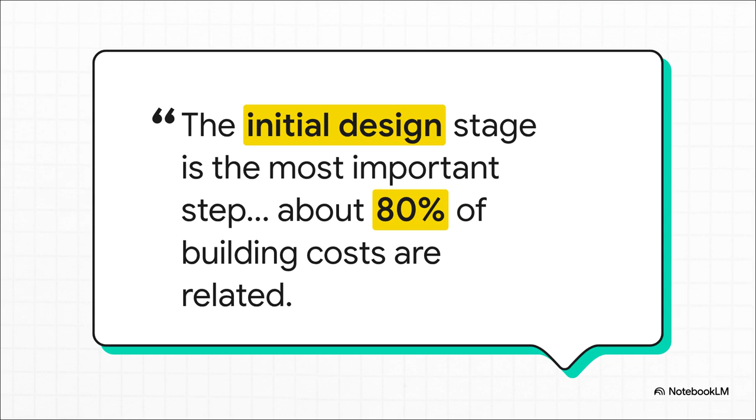And this is so crucial because decisions made right at the beginning, at the design stage, have these enormous, long-lasting consequences. The choice of a window, its size, its placement, can lock in decades of energy bills and comfort levels before anyone even sets foot inside.

Okay, but this is where the story gets really interesting. Because the solution isn't about throwing more tech at the problem, it's about this really clever piece of passive design that works with nature, not against it. So let's meet the hero of our story, the light shelf. Now I know it looks deceptively simple. I mean, it's basically just a shelf in a window. But what it does is incredibly smart. And it's a passive system, which means it doesn't need any energy at all to do its job.

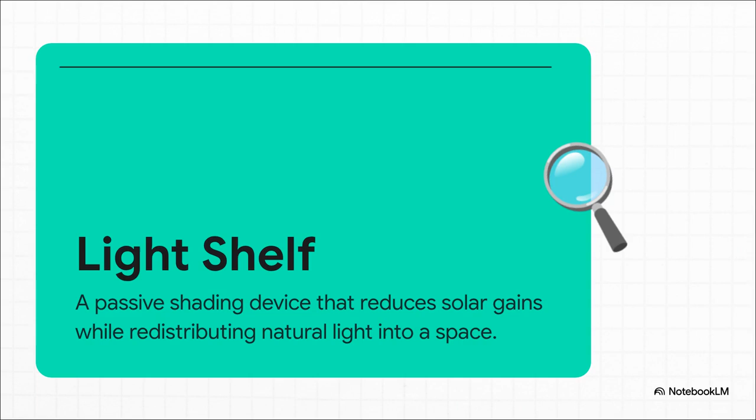The real genius here is its 2-part job. On one hand, the shelf blocks that harsh, direct sun that causes all that heat and glare right near the window. But at the exact same time, its reflective top surface bounces this gentle, indirect light up onto the ceiling, illuminating the entire room more deeply and evenly.

But just slapping a shelf on any old window isn't going to cut it. Like any good recipe, the real magic is in getting all the ingredients and their proportions exactly right. The researchers were facing this really complex balancing act, kind of like baking the perfect cake, right? If you let in too much light from a huge window, you get unbearable heat. That's way too much sugar. But if your shelf is too big, sure, you block the heat, but you lose all that useful light, not enough flour. It's all about finding that perfect equilibrium.

And these are the 2 main things they were trying to balance. First, thermal comfort, making sure people actually feel good. Not too hot, not too cold. And then visual comfort, making sure they can see well without that annoying, productivity-killing glare. Essentially, they needed a way to measure both of these very human experiences.

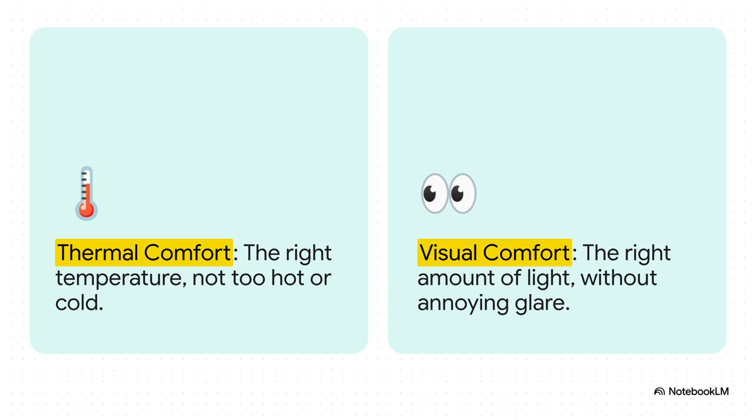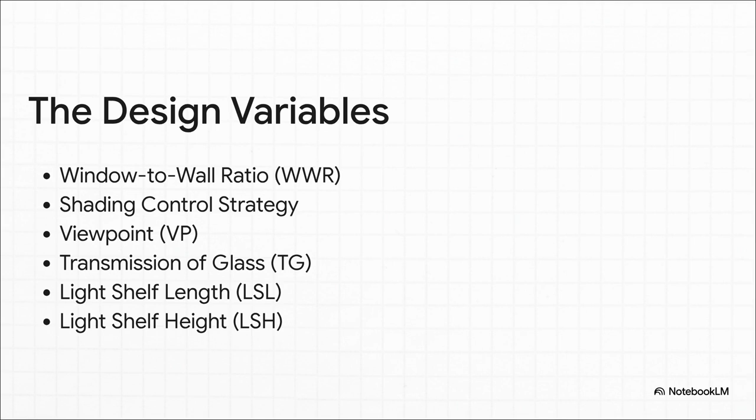So they started playing with the ingredients. They tweaked the window-to-wall ratio. That's basically just how much of the wall is glass. They changed the shelf's length and its height. They experimented with different types of glass, and they even modeled various automated shading strategies. Okay, so finding that perfect combination wasn't just some thought experiment. They had to put these designs through thousands and thousands of rigorous digital tests.

7,500. That's not a typo. To find that perfect recipe, they used powerful computers to simulate a standard office in Tehran, testing 7,500 different design combinations. I mean, talk about an epic search for the ideal window.

And they had really clear goals. For temperature, they wanted a design where fewer than 10% of people would feel uncomfortable. That's a metric called PPD. And for the lighting, they were aiming for a glare level so low you wouldn't even notice it. That's measured as DGP. They were hunting for that sweet spot.

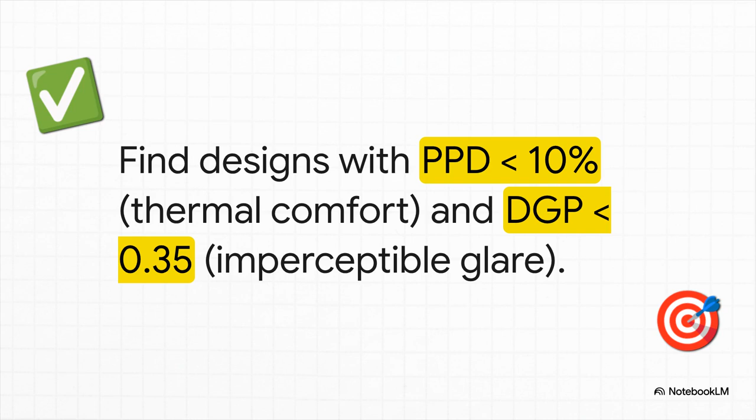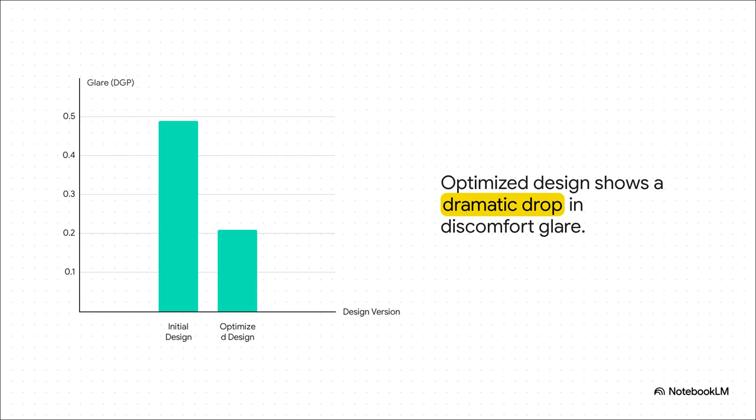So just how big was that drop? Well, the numbers are pretty incredible. We're talking a maximum reduction in glare of over 70%, and a drop in thermal discomfort of over 57%. That is a huge, huge improvement in the quality of that workspace.

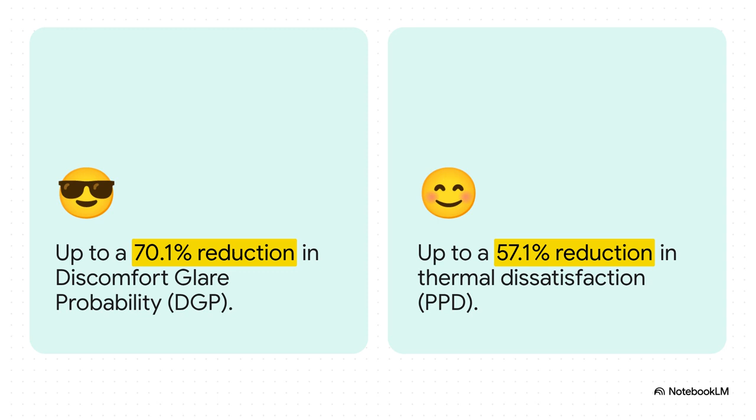So this is the really cool part. This isn't just some interesting academic paper. The results give us a practical blueprint that architects and designers can use, like right now, to build better, more comfortable offices. And here it is. This is the winning recipe for a south-facing office in Tehran. You've got the ideal design, a window that covers 60% of the wall, a light shelf that's 0.4 meters long, and some very specific glass. This is a real, actionable blueprint for architects.

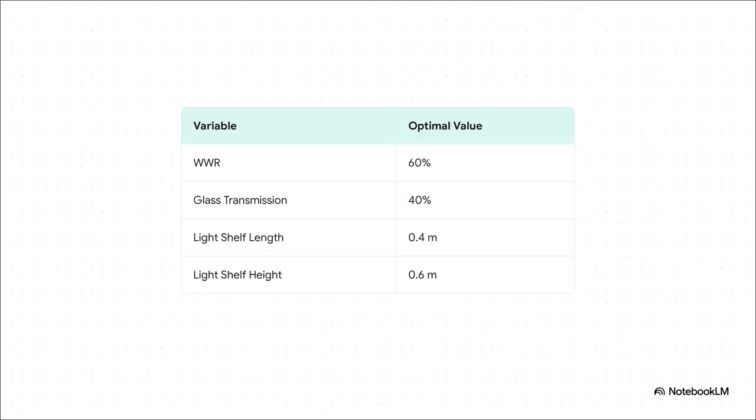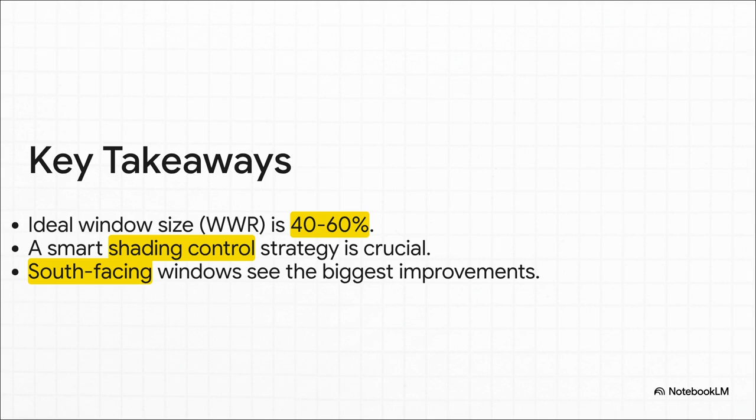So what are the big takeaways from all this research? Well, first, there's a sweet spot for window size, 40 to 60% of the wall. Turns out, bigger isn't always better. Second, you absolutely need a smart, automated shading system. And finally, this whole strategy works best for south-facing windows, the ones that get blasted by the most intense sun.

And that's really why this all matters so much. This isn't just about saving a few bucks on the energy bill. It's about creating spaces that are actually designed for humans. A comfortable employee is a happier, healthier, and, you guessed it, a more productive employee. So smart design is good for the planet, and it's good for people.

It really makes you think, doesn't it? If a simple, non-mechanical shelf can have such a profound impact on our well-being and our energy use, what other elegant, simple solutions are we overlooking? What else is just waiting to be rediscovered in the buildings we walk past every single day?